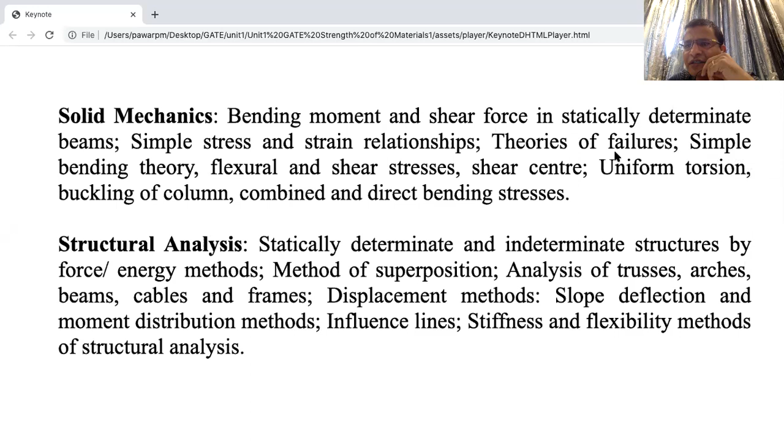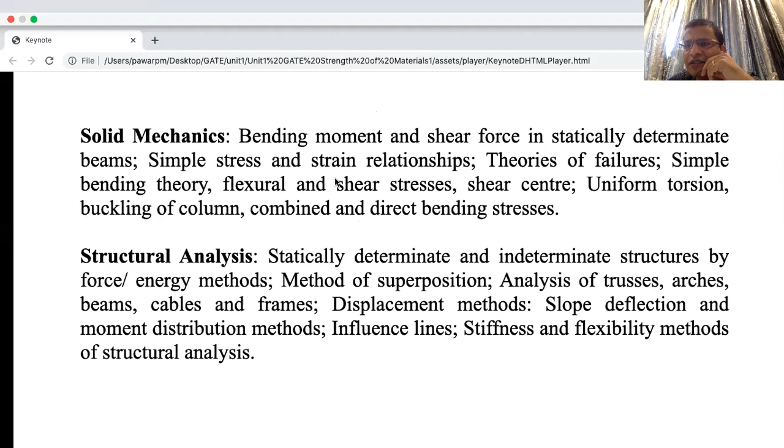Theories of failure, simple bending theory, flexural and shear stress, shear center, uniform torsion, buckling of column, combined direct bending stresses.

What is strength? As you know, strength is the ability of a part or element of a structure to resist failure.

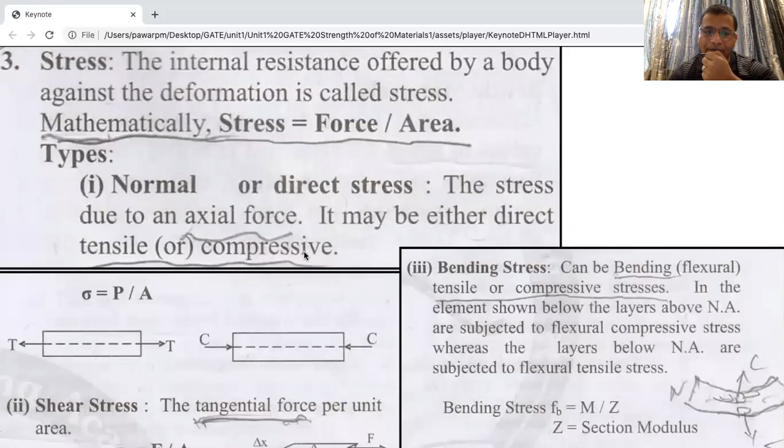Next we will study the point called stress. All of you know stress is nothing but force divided by area, but most of the times when we say stress, what comes to your mind is force divided by cross-sectional area. But please remember, this stress is called axial stress. As we discussed earlier, there are two main types of stresses. One is called normal or direct stress, and another is called shear stress. The normal stress is of two types, tensile or compressive, and shear stress is given here.

You can see shear stress also has the formula force divided by area, but please understand that the area in normal stress is called cross-sectional area. So what is cross-sectional area? Cross-sectional area is the area perpendicular to the applied force. Earlier you might have studied the definition of stress, but now I am giving it a different angle. The cross-sectional area is nothing but the area perpendicular to the stress.

And what is this area in the shear stress? This area is nothing but the area along the applied force or along the body. For example, if we take a pile foundation, the bottommost part of the pile is a cross-sectional area, and the skin part of the pile is the area which will help to resist through shear stress, and the bottommost part will help to resist through the direct stress. So please understand that.

Apart from normal and shear stress, there are two other stresses we have to understand. One is bending stress, then there is shear stress due to torsion, and in bending there will again be two stresses: one is bending stress, and another is stress due to shear force. In bending stress, you will see sigma is equal to M by Z, and here the formula is F by A. That difference you have to understand. Again, M is a component of force, whereas Z is a component of geometry. You have to remember that.

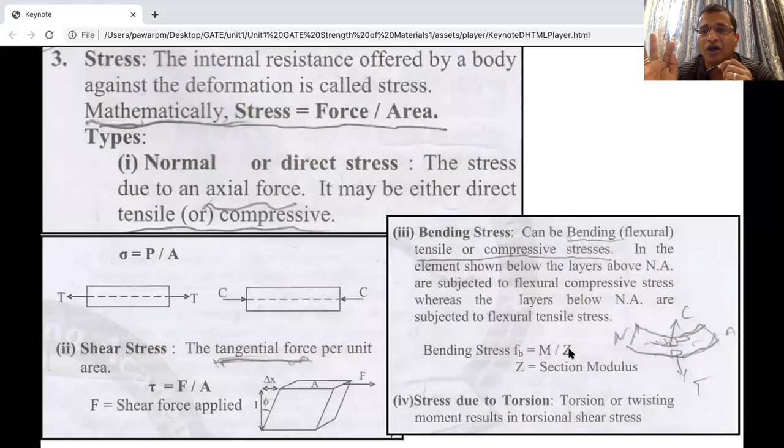You can say axial will create normal stress, shear stress will create shear, bending stress will create normal, and torsion stress will create again shear stress. So you have to remember the difference.

Let's go to strain. What is the definition of normal strain? The way we have two types of stress, normal stress and shear stress, similarly for strain also there are two types. One is normal or direct strain, and another is shear strain. The direct strain is nothing but change in length caused by normal force in its direction, whereas shear strain, in case of tangential force, is a change in angle. So shear strain is calculated based on the change in angle.

You can see here this bottom part is fixed and load is applied here, and that's why the body will get deformed in this direction, and this angle will help us to calculate the shear strain. Next, one more strain is there, that is called volumetric strain. What is volumetric strain? It is nothing but the ratio of change in volume to the original volume.

Further, we have studied Hooke's law. What is Hooke's law? Stress is directly proportional to strain within elastic limit. The next part, within elastic limit, is very important. Stress is directly proportional to strain within elastic limit, and strictly speaking up to limit of proportionality. So you have to understand two different things: one is limit of proportionality, another is elastic limit. Instead of within elastic limit, actually it is up to limit of proportionality.

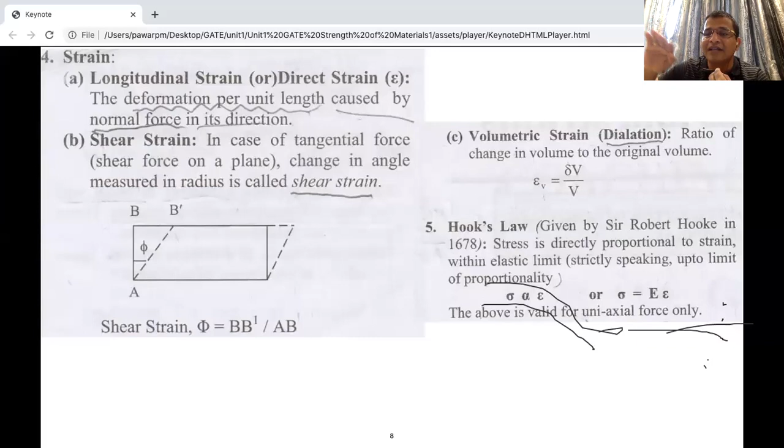Let's go to the next important point. A lot of questions come in various competitive exams, not only GATE, but MPSC, UPSC. Though for university examination it is just 2 to 10 marks or 5 marks sometimes, this chapter is very important from the competitive exam point of view. That's why you should read a little bit of material-related books also, because we are structural engineers; mostly metallurgy and mechanical people are quite conversant with material components like carbon and steel, but we are not, and it's good to study that part.

Basically, when we take a material from the structural point of view, there are two types of materials. One is ductile material and another is brittle material. So what is meant by ductile material or ductility? When you go in final year, there is a separate chapter in earthquake engineering about ductility. If you can see in this diagram, ductility will be important beyond the yield limit.

Within elastic limit, ductile material and brittle material behave the same. Please understand that part. So where is the difference? Most people don't understand that. The difference in ductile and brittle material starts beyond yield limit. So what happens? From the starting point up to failure, how long it prolongs, that means the ductility. As it takes a lot of time for the failure, that kind of material is ductile, and such material is good for earthquakes, so that it absorbs as much energy.

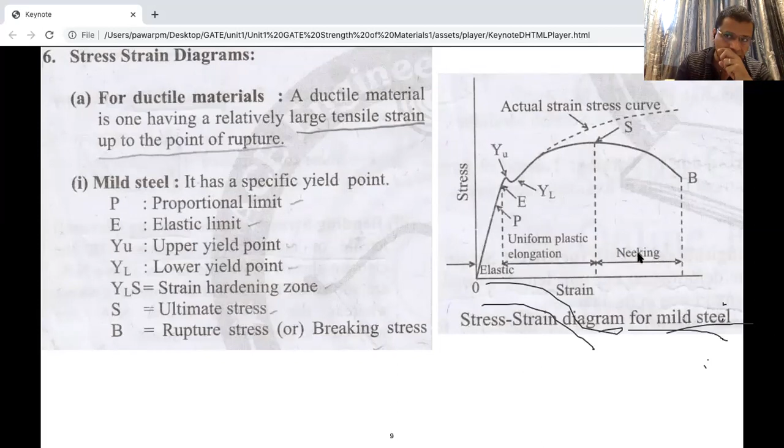This part is called the elastic phase, then this part is called uniform plastic elongation, and thereafter neck formation takes place. So if you have done the UTM test of a rod, you can understand this neck formation phenomena, and then the last B point is called rupture stress or breaking stress, where the material actually fails.

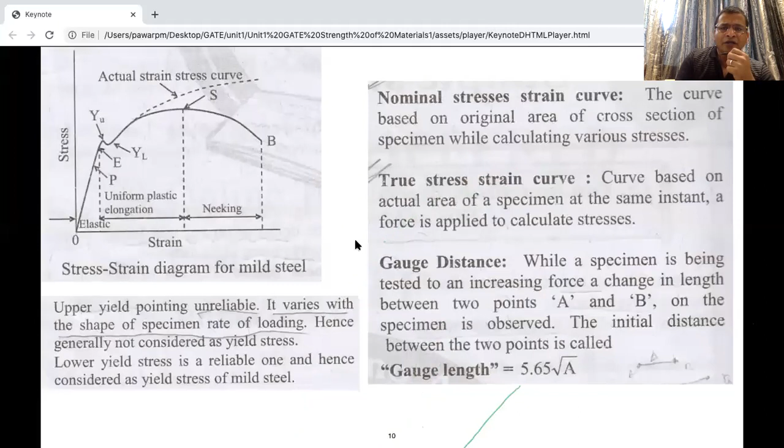Okay, so this is what is explained here. So I will skip this part, already we have discussed this. Then in this, we have seen earlier this was related to mild steel.

Now a little bit of description is there for Tor steel. Like for Tor steel and aluminum, they do not have any specific yield point. So please understand, for some material it is very difficult, there is no specific yield point, and in that case what we need to get is called proof stress.

So it is called proof stress. And how do you decide? It is nothing but when it crosses the 0.2% of strain point we take. So here I will read this part, you will understand. A line is drawn, this is very important.

Sometimes a proof stress question will be asked. A line is drawn on the stress strain diagram parallel to the initial linear part of the curve, but is offset by some standard amount of strain. This 0.2% of residual strain is taken, and such a line is drawn to cut it here, and this is what you get, called proof stress, where we are not getting the yield stress.

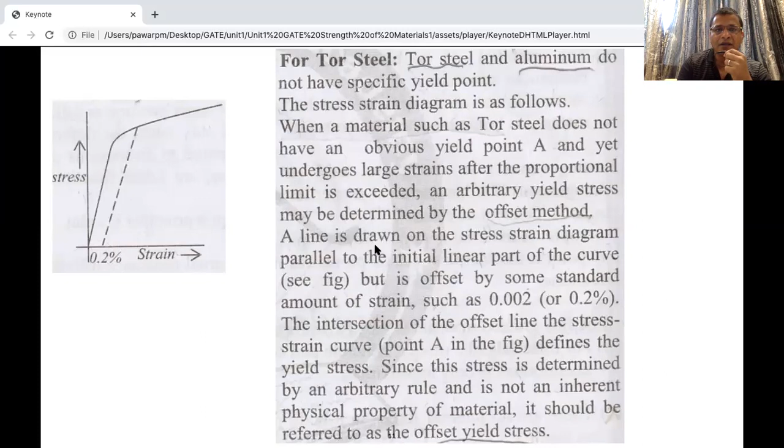Then we will understand brittle material. So what is brittle material? Material that fails in tension at relatively low values of strain is classified as brittle material. So you can see a brittle material will not have a lot of phases like what you have seen in mild steel. Here it fails suddenly, and you can see within the elastic limit it behaves in a similar manner as your ductile material.

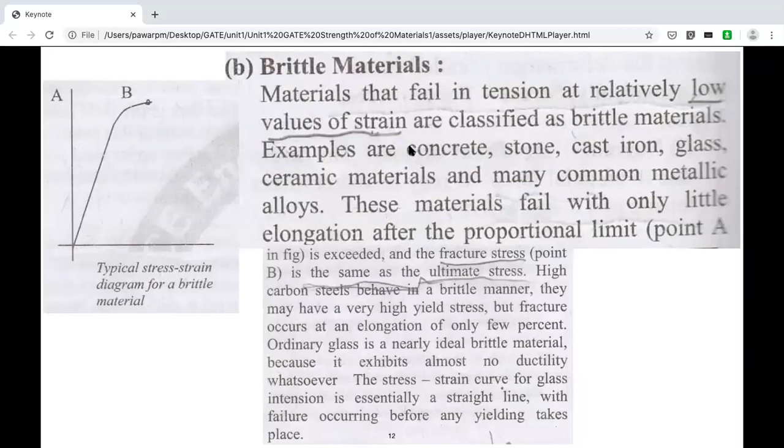So we'll go to the next point. So here there are a lot of definitions. When I share the material, you can read. We have discussed about elastic material, plastic material. So this is new for you.

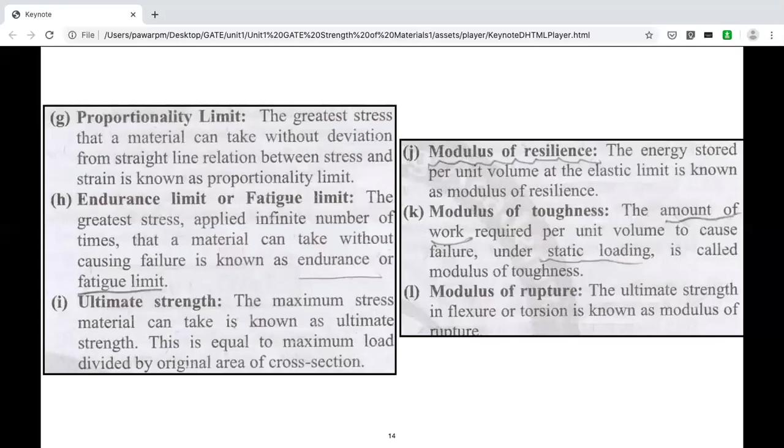Then proportionality, we have seen. Endurance limit is maybe a new term for you, or fatigue limit. So the greatest stress applied infinite number of times that a material can take without causing failure is known as the endurance limit. So this one is like continuously applying the load, as in UTM, where we go to the yield limit. But we have to understand another way of failure, that is called fatigue limit, fatigue.

So in that we don't apply a high amount of force till the stress goes to the yield stress. We apply less amount of stress, but we apply it in a cyclic manner.

In your childhood, you might have tried to break aluminum wire or steel wire by doing a repeated amount of cycles. There we are not pulling to make the material fail, but applying a lesser amount of stress in a cyclic manner, and that phenomena or kind of failure is called fatigue limit, shown using a stress versus N curve.

S stands for the amount of stress applied, and N stands for number of cycles. As the stress is less, the number of cycles required will be more, so the curve is decreasing. When applied stress in fatigue is less, the number of cycles will be high, but when applied stress is high, the number of cycles is less. You have to understand this.

In a working manner, for example, you might have seen a cycle chain or vehicle chain breaking. We daily apply rotations on that chain, and fatigue kind of stresses come and accumulate, and slowly one day it fails. That is called the endurance limit.

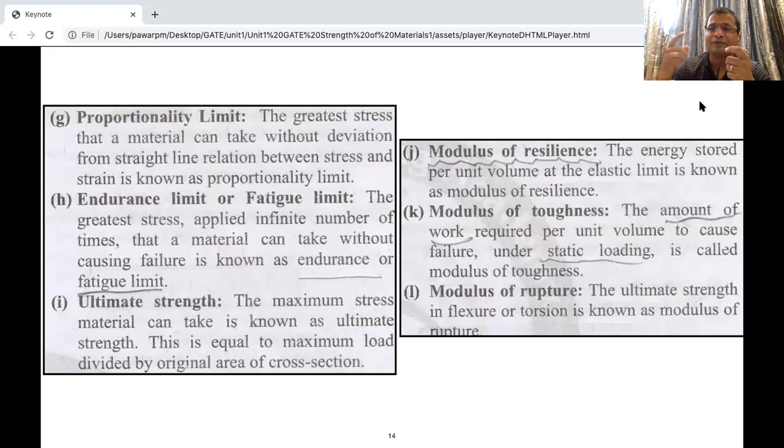That's why when deciding warranty, for example for a phone or material, regarding this kind of fatigue, people estimate the regular load that comes in usage, and based on that number of cycles they apply, they decide the limits.

This is one more definition you should remember, called strain hardening. You have seen one graph going down with the dotted line going up. In some material, instead of the graph going down, it starts going in the upward direction. That phenomena is called strain hardening.

The increase in strength of material after the plastic zone due to rearrangement of molecules of the material is called strain hardening. This is sometimes a useful phenomena, so you have to understand that.

Next, you have already studied this, we are brushing it up, and then immediately we'll start question answer solving. What is factor of safety? It is defined as the yield stress divided by working stress for the ductile material.

There are two different definitions you have to understand: one for ductile material, another for brittle material. For ductile material, it is yield stress divided by working stress, where you will be able to find out exactly yield stress. Whereas in case of brittle material, it is ultimate stress divided by working stress.

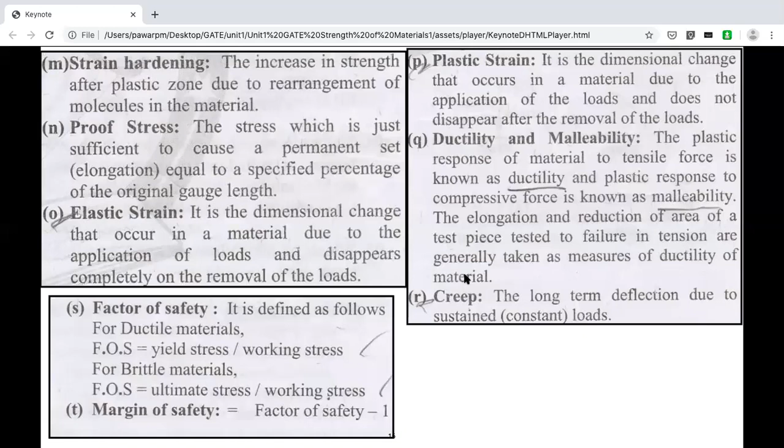The elongation and reduction in the area of the test piece tested to failure tension are generally taken as a measure of ductility of material.

Creep is another very important phenomena, especially in soil mechanics, where creep becomes important. The long-term deflection due to sustained load means, for example, if we construct a building, whether load changes in a building, assuming that furniture and other material are considered.

So the dead load, ignoring wind load and earthquake load, remains constant. But because of creep phenomena, there will be settlement in the foundation, so we have to take care of the foundation properly. If settlements occur, initially you get hair cracks, and then big cracks may also occur. That phenomena is called creep.

That is, your force is constant, still deformation over a period starts taking place. When we draw the stress strain curve, we don't take time into account, it's an instant phenomena, whereas in creep it is time dependent. So what happens is, over a period, deflection starts.

In that case, force is constant, means in the stress strain curve, what is constant? Force divided by cross sectional area, that is stress, remains constant, whereas the strain keeps on increasing. So under constant stress, strain will keep on changing.

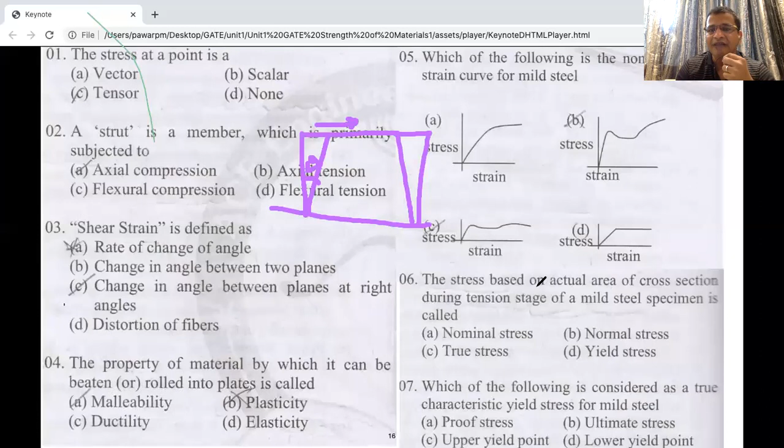Next question: the property of material by which it can be beaten or rolled into plates. Please don't get confused here, sometimes people confuse this with ductility, but the answer is malleability.

Which of the following is the nominal stress strain curve for mild steel? If you remember, there's a chance you get confused. This B curve and C curve almost look the same, but strain hardening takes place in one, whereas in mild steel strain hardening won't take place. That's why the answer is C.

So then we'll go to the sixth question. The stress based on the actual area of the cross section during the tension stage of the mild steel specimen is called - please understand, one is called nominal stress. What is nominal stress? P divided by A, the cross sectional area. But there is something called true stress. What is true stress? Actually, when we elongate, there is neck formation, and the area starts reducing under tension.

Under compression, cross-sectional area starts increasing, and that's why the answer will be true stress. Answer will be nothing but true stress.

Yes, some of them are ticking on my answer, so you can use annotation. If you want, you can answer before I give the answer. That will be good, so that interaction will happen. Good. Some of you are using annotation. There is an annotate option, and you can click. Next question. But before I read a question, please don't answer, otherwise others will lose interest.

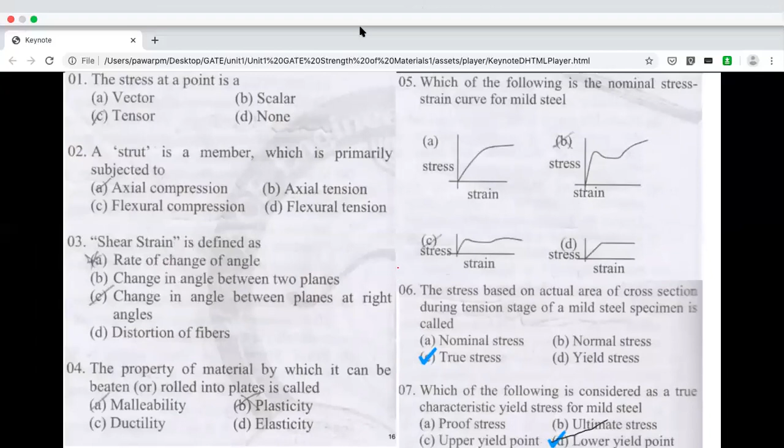Which of the following is considered as a true characteristic of yield stress for a mild steel? There is proof stress, ultimate stress, upper yield point, and lower yield point. From this group you can understand. I guess the answer is lower yield point. Yes, some of you have answered correctly. Very good. So lower yield point is the correct answer.

I request those who are joining again to mute their audio. Oppo A33F, instruction for you. Okay, let's go to the next question.

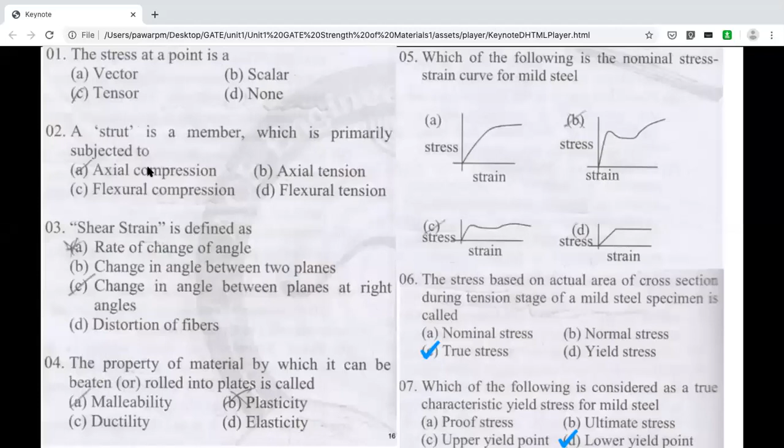For mild steel, the lower yield point is more significant than the upper yield. Just now we saw the answer: mild steel characteristic is lower yield point. So why is this lower yield point important? Strain is more at this point, it is less than upper yield point, it is less affected by the shape of the section. Maybe the answer is C. Yes, the answer is, it is less affected by the shape of the section. Let's go to the next point.

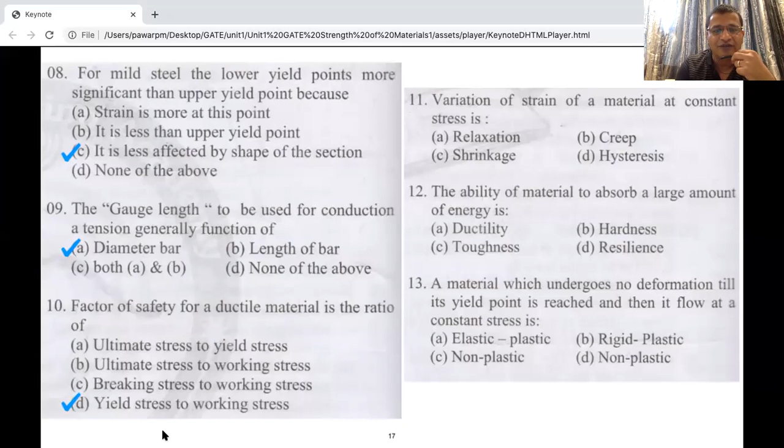What is the gauge length to be used for the conduction, a tension generally function of? Here it is the diameter of the bar. Where the tension is a function of the bar diameter, gauge length becomes important. Next is factor of safety. What is factor of safety for ductile material? As we have seen, yield stress to working stress. We have discussed a lot, so I will go quickly.

Variation of strain of a material at a constant stress. Tell me the answer if you have understood the theory. I will wait for 2 minutes. It's very simple. I said force was constant, but strain was increasing. Very good. The answer is creep. Correct.

Next, the ability of material to absorb large amount of energy. I have explained this using the stress strain curve. So the answer is toughness. This is a different answer as compared to ductility. We'll see why the answer is this.

Then the material which undergoes no deformation till its yield point. This we have not studied, so I will focus on this part by drawing. A material which undergoes no deformation till its yield point is reached and then follows the constant stress path. Up to yield point it won't deform and suddenly it starts following something like this. Is it elastic plastic, rigid plastic, or non-plastic? The answer is B, rigid plastic. The initial part was rigid.

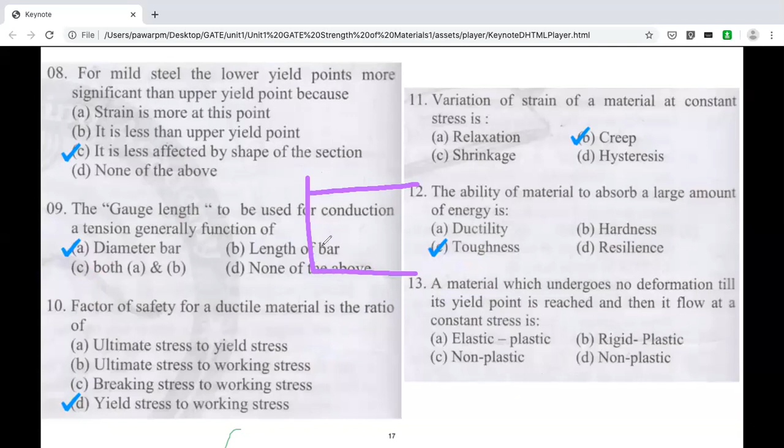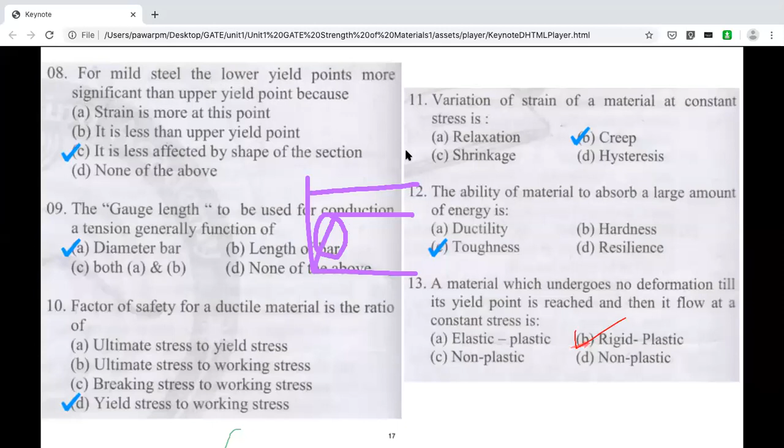If it had been something like this, it is called elastic plastic. The initial part behaves elastic and then it will be plastic. Some of you have given the answer correctly. The correct answer is rigid plastic. Let's go to the next question.

Please, all of you, mute your voice. Okay. So next we will go to the next question.

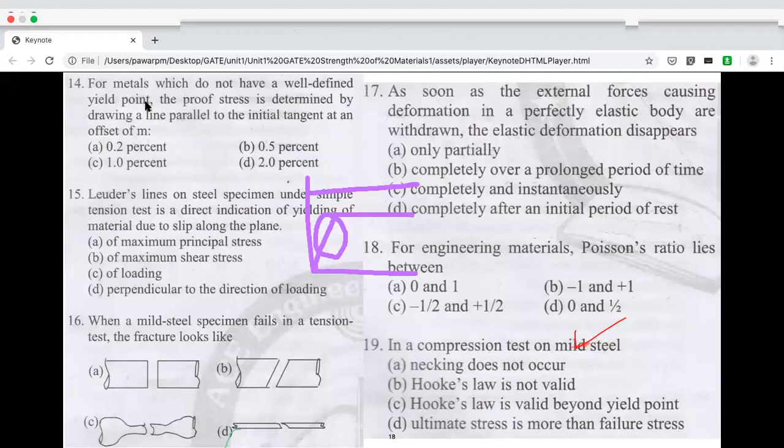For a metal which does not have a well-defined yield point. This is a very simple answer. When the yield point is not well defined, we use proof stress, and it is determined by drawing a line parallel to the initial tangent at an offset of how much: 0.2%, 0.5%, 1.0%, 2%? Quickly, very easy. Yes, some of you have given the correct answer. That is 0.2%. Next, let's go to question number 15.

Lüders lines on steel specimen under simple tension test are a direct indication of yielding of material due to slip along the plane. This is a little difficult question. I guess it may be the maximum shear stress. These lines form because of maximum shear stress. If you study failure of material in detail, you will come to know. If not, for the time being remember this if it comes in the exam.

Next question is very easy, by looking at the diagram: neck formation phenomena. When a mild steel specimen fails in a tension test, how does the fracture look for mild steel? This is like a ductile failure.

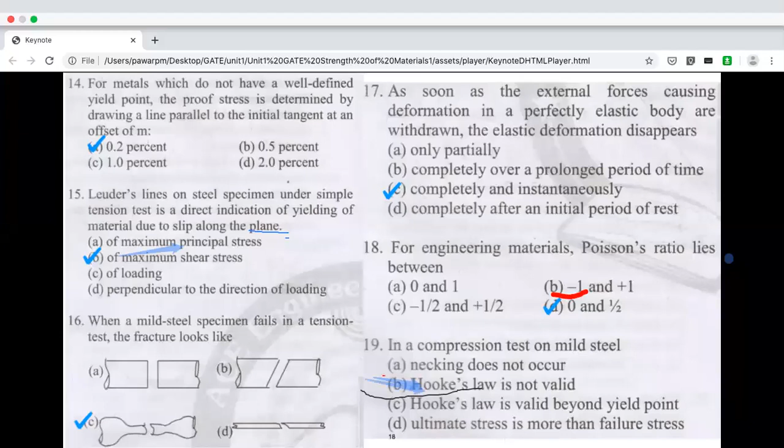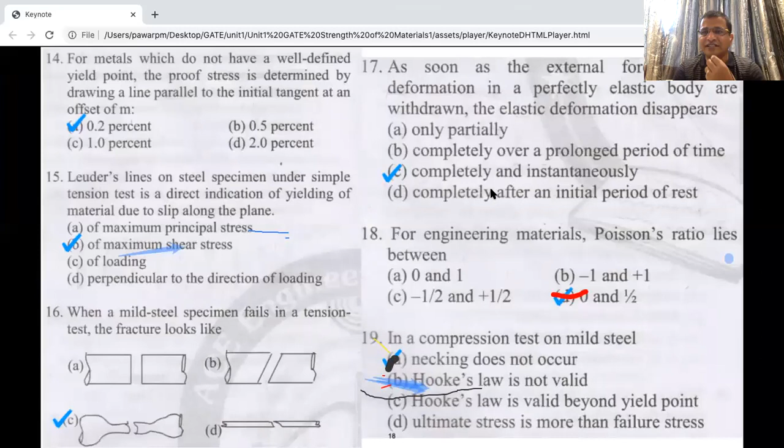In a compression test on mild steel, let's see the answer. The answer is necking does not form. If you have noticed, in the case of tensile stress necking forms, but in the case of compression necking will not form. Okay, let's go to the next part, 20th question. Once we finish the theory part, I will ask you to talk, maybe before I go to the next part.

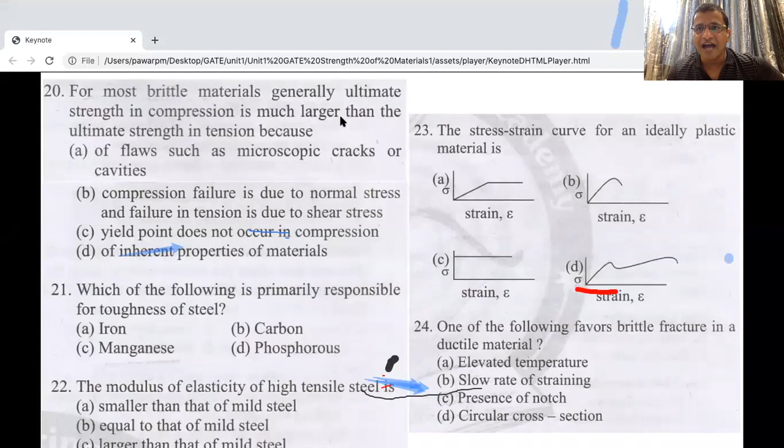20th question. For most brittle materials, the ultimate strength in compression is generally much larger than the ultimate strength in tension because, can you guess? This is related to metallurgy, but it will be asked in civil engineering also. As compared to tensile, compressive strength is more. So what is the reason? The answer is flaws such as microscopic cracks or cavities get compressed, and that's why strength increases as compared to tensile.

Let's go to 21. Which of the following is primarily responsible for the toughness of steel? Let's see your physics knowledge. Okay, good. The blue pen: B, carbon. I guess all of you must know at least this much metallurgy. No, the answer is manganese. Carbon is for hardness, I guess. So this is manganese.

You can check that. The modulus of elasticity of high tensile steel is smaller than mild steel, equal to mild steel, larger than that of mild steel, or equal to that of aluminum. The answer is equal to that of mild steel, because sometimes the elastic properties will not change; beyond elasticity, properties will change.

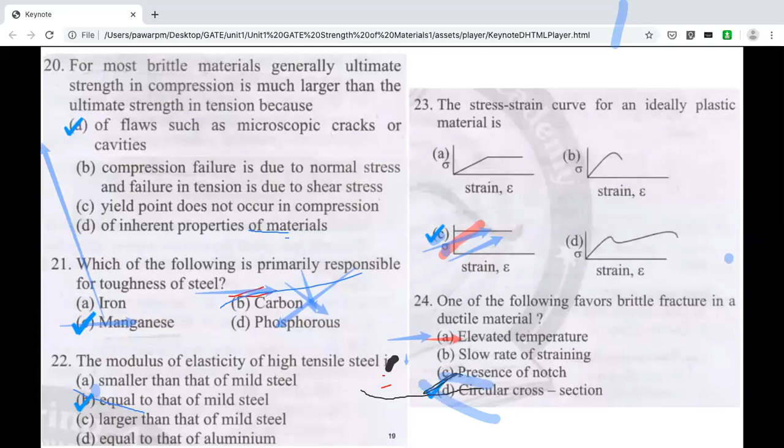Okay, let's go to the stress-strain curve for ideally plastic. It's very simple. Ideally plastic, yes, the answer is C. Let's go to 24. Which of the following favors a brittle fracture in a ductile material? Elevated temperature, slow rate of strain, presence of notch. So the answer is circular cross section. Check this. You might have understood these question answers are a little different here compared to what we were checking in the university.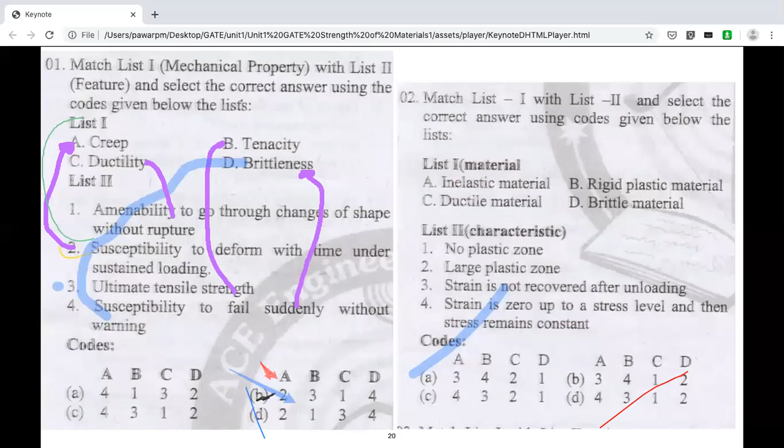Yes, correct. And then the first part, it changes shape without rupture, is nothing but ductility. So by these arrows we have to find the answer. For A 2, for B it's 3, for C it's 1, and this. Let's see whether the answer is B or not. Let me check. Yes, answer is B, correct. Let's go to the next question.

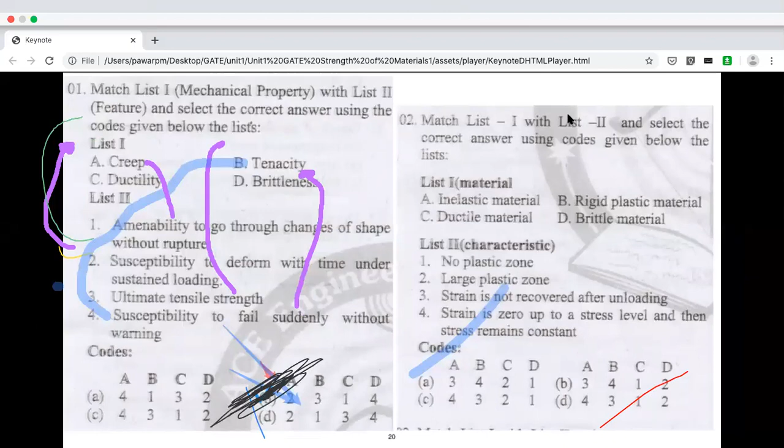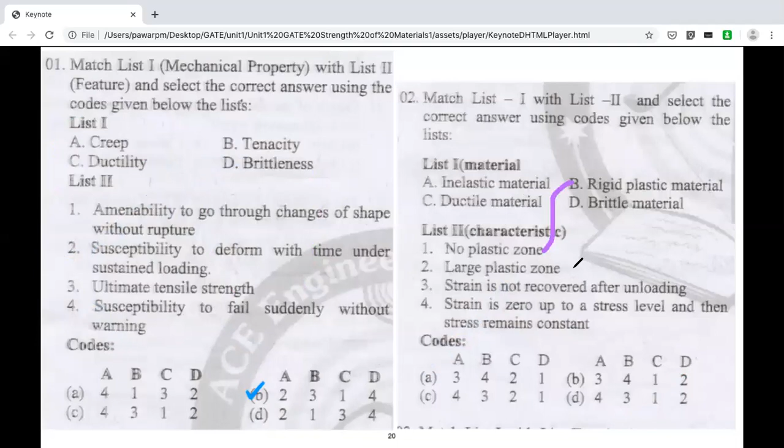Okay, here match the pair. Inelastic material. So we will read this part. No plastic zone. What is meant by no plastic zone? Obviously rigid plastic material. Then large plastic zone. I guess it is maybe ductile material or inelastic material. Strain is not recovered after unloading. Yes, that is called maybe inelastic material. Strain is 0 up to the stress level.

Oh, I made a mistake here. So the fourth one will be linked with B, that is rigid plastic. So this is wrong from my side. Strain is not recovered after, that is correct. Large plastic zone; no plastic zone maybe linked with brittle. Let's see if we have done correctly. So the answer will be, let me check. Yes, answer is A.

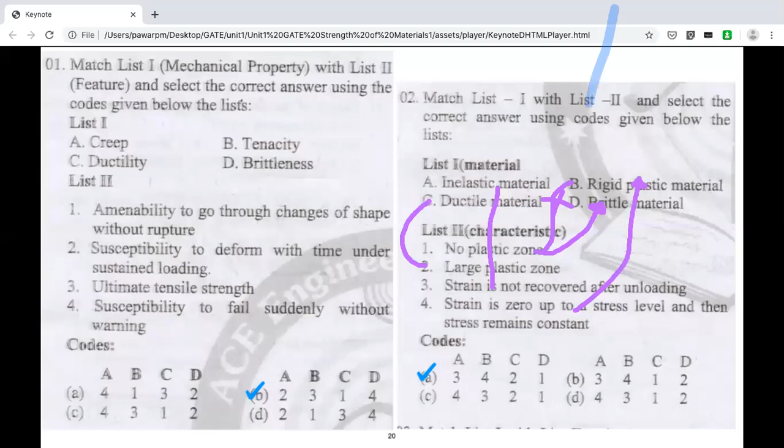So for A, 3, correct. For B, 4, that is rigid plastic, correct. For C, 2, large plastic zone for ductile, and for D, 1, that is brittle material, no plastic zone. That is, suddenly it fails. Plastic zone will not be there. Okay, good. Let's go to the next question.

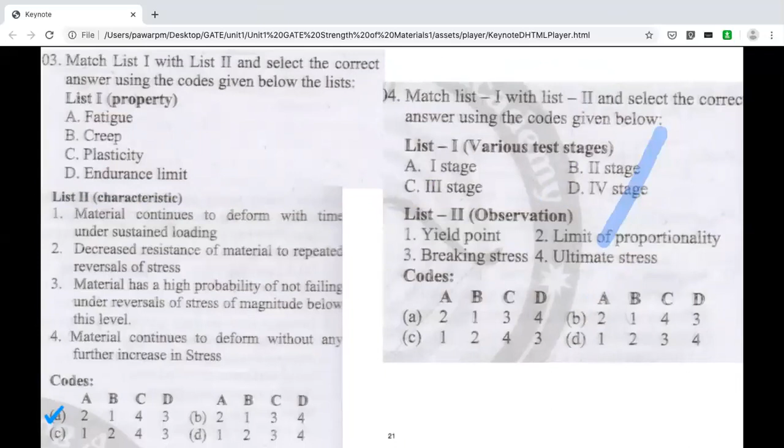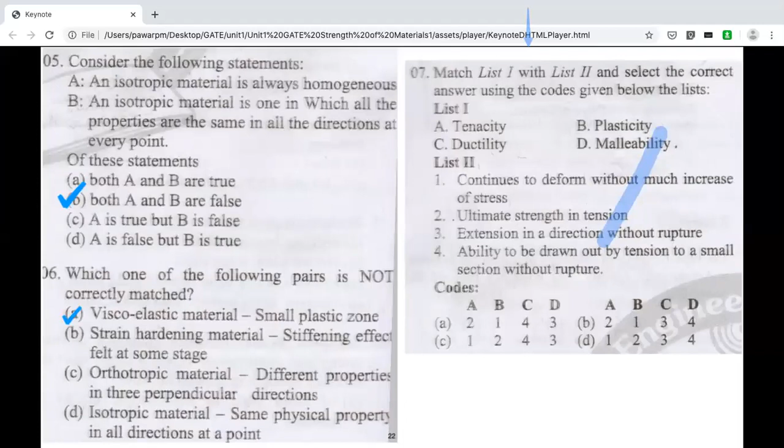So these are similar questions. I will skip some of this in the interest of time, so that you can read when I provide this material. You can read once again some of the points. So this is how such questions are asked in GATE and competitive exams. So I will skip this part. Maybe you can see the answer; similar match the pair questions are there. So I'll skip that part. And then we will start one more theory part.

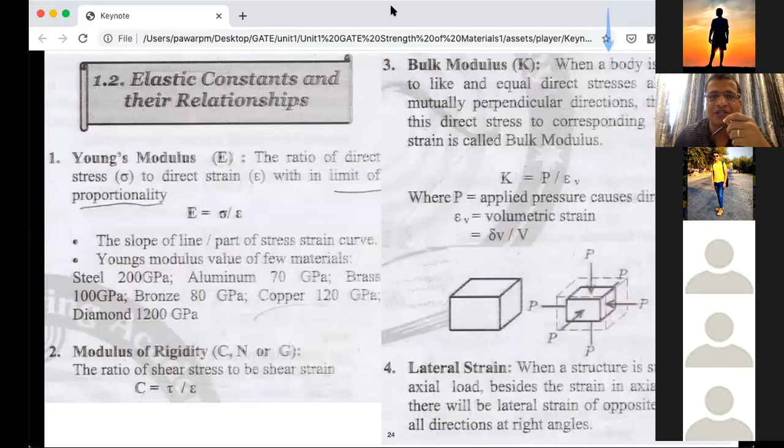So let us continue with the next topic so that we can cover at least this part today. So, elastic constants and their relationship. This is another important point we will cover here. Let's see what is there. Elastic constant: as you know, Young's modulus is nothing but the ratio of direct stress to direct strain within the limit of proportionality. Please understand, it is not within elastic limit.

And the next point is very important, that is the values of Young's modulus. You'll have to remember them so that you get the idea about the behavior of structure, for whatever materials we generally use, metals, etc. The highest Young's modulus is of steel, 200 GPa, aluminium around 70 GPa. Why am I saying around? Because as the composition of material changes, exact material property values will be different. That's why I am telling this. Then copper 120, diamond around 1200 GPa. It's quite high.

Modulus of rigidity. Please understand the notation for modulus of rigidity is sometimes C, N or G. It is nothing but the ratio of shear stress to shear strain. Then bulk modulus is another. So there are three moduli of elastic constants: Young's modulus, modulus of rigidity, and bulk modulus.

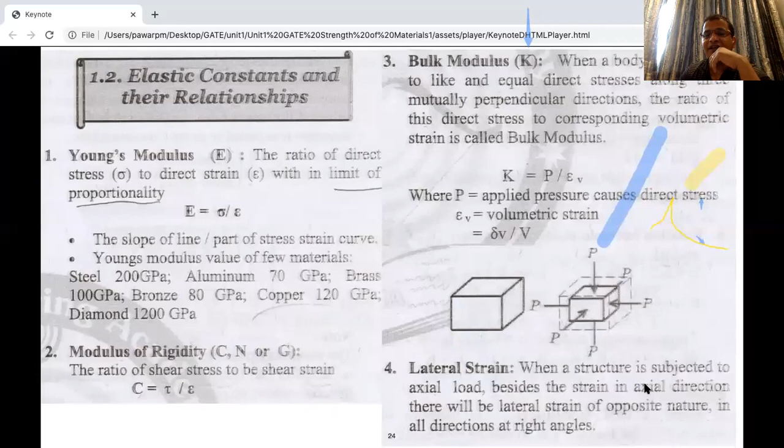Opposite nature means if I apply tension in the one direction of interest, the other two directions will have compression. If I apply compression in one direction, the other two directions will have tension, of course at right angles. From that we get what is called Poisson's phenomenon. Poisson is a scientist's name. From that we get the definition of Poisson's ratio: the ratio of strain in the lateral direction to that of the axial direction.

So you can see mu is equal to minus lateral strain by linear strain. Why is minus given? Because when we apply compression, the other side will be tension. So signs are positive by negative or negative by positive, so the ratio will always be negative, and multiplying by minus you get a positive answer. The maximum possible value of Poisson's ratio is 0.5, for an ideal elastic incompressible material whose volume strain is 0. You should remember some Poisson's ratio values, because they may be asked in the exam as MCQs.

For cork, Poisson's ratio is 0. Poisson's ratio 0 means if I apply axial force, nothing will happen in the other two directions. Concrete 0.1 to 0.2, glass 0.2 to 0.27, cast iron 0.2 to 0.3, steel 0.27 to 0.3, aluminium 0.33, brass 0.34, gold 0.44, and rubber 0.5. So usually for metals we take around 0.3, and for concrete somewhere around 0.15 to 0.2 as Poisson's ratio.

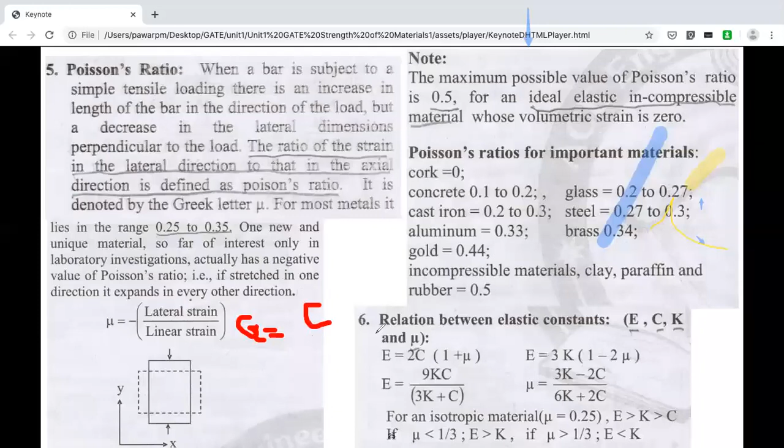Oh, so E divided by 2 into, okay, it's not working. So please remember, G is equal to E divided by 2 into 1 plus mu, is very easy to remember, and K is equal to E divided by 3 into 1 minus 2 mu is the relation. And this relation also you should remember, because for competitive exam you cannot waste your time in deriving.

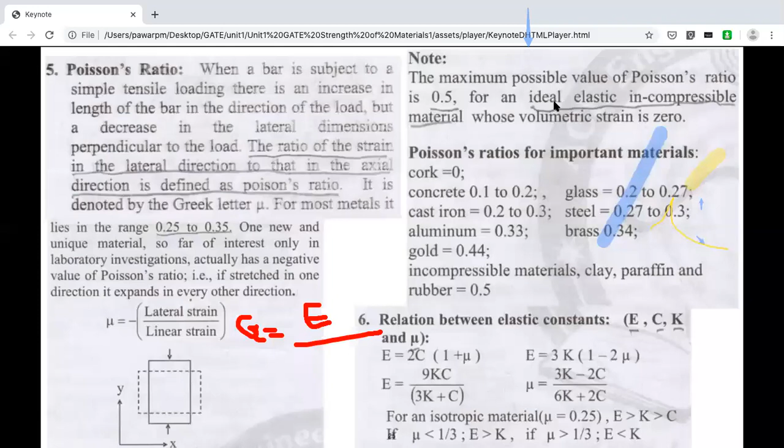So all such formulas for my GATE, I remember I had mugged, or maybe somehow I had remembered 400 to 500 formulas and around 400 to 1000 different values and keywords. So you should have all these things in the back of your mind while remembering. If you link it with its physical things, then it will be easy.

And you also should know that for isotropic material, E will have the highest value, typically for 0.25 for isotropic material. E will have the highest value. Thereafter K, I have derived in next slides how it comes, and then G or C will have the lowest value.

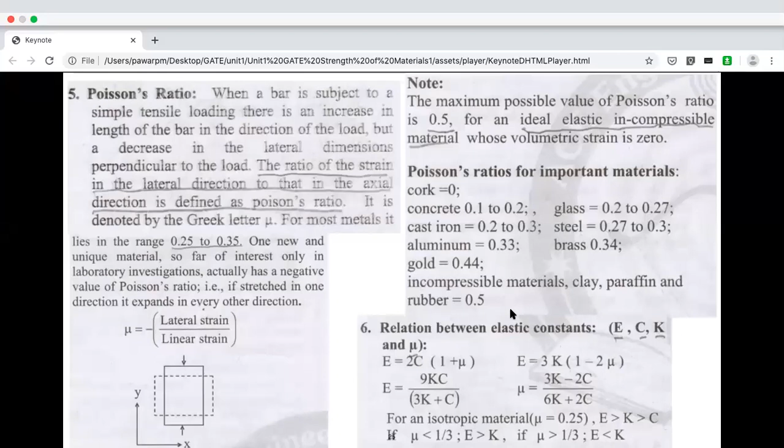Okay, then for the isotropic material, elastic constants. So this is another question usually asked. This is the advanced part which you have not studied. I have copied this for your reference, how these constants are there, but sometimes these questions are asked. As I told you, there are 3 types of material based on the isotropy nature. One is isotropic material. The number of independent elastic constants are 2, that is E and mu. For orthotropic material, these are 9, and for anisotropic there will be 21.

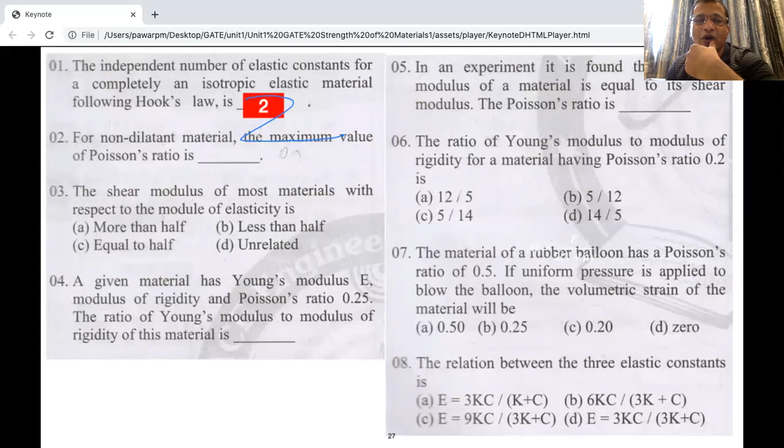So now we have covered the theory part. For this, let us take question answers related to that and understand. So the independent number of elastic constants for a completely isotropic elastic material following Hooke's law is, just now we have seen, the answer was 2. Then for non-dilatant material, the maximum value of Poisson's ratio is, so you remember it will be the highest value, it is 0.5.

Okay, then the shear modulus of most of the material with respect to modulus of elasticity. Shear modulus of most of the material, you can derive it, how the answer comes. If you don't get clear why this answer comes, the answer is less than half. So if you derive it by taking maybe mu is equal to 0.3, somewhere I have derived, I will show you that.

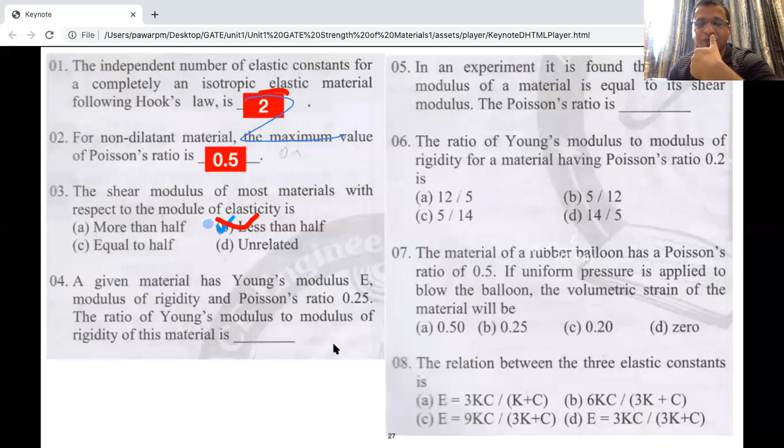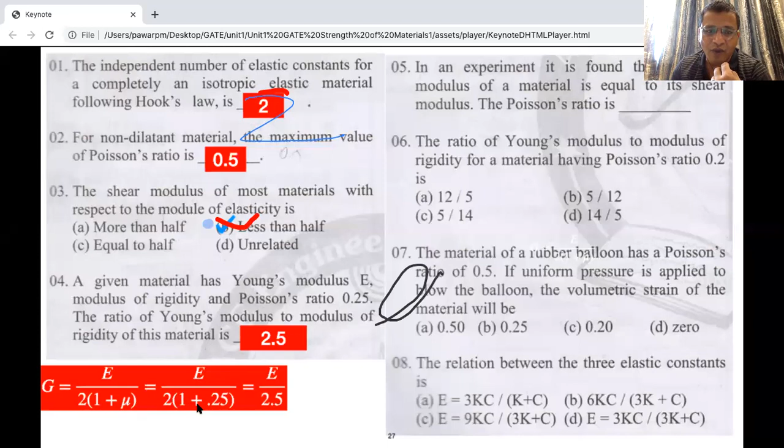Then a given material has a Young's modulus E, modulus of rigidity G and Poisson's ratio as 0.25, then the ratio of Young's modulus to modulus of rigidity of this material. So here it is asked the ratio of Young's modulus to modulus of rigidity, that is E by G ratio. So it is 2.5. How the answer comes, I have derived here. So as I told you, what is the G formula? Actually G is equal to E divided by 2 into 1 plus mu. Okay, and then E is equal to 2 into, we have to put this as 1 plus 0.25, and then you get E by G as 2.5.

Okay, let's go to the next question here. In an experiment, it is found that the bulk modulus of material is equal to its shear modulus. What is the meaning of that? G is equal to K. If G is equal to K, then what is Poisson's ratio? Very interesting question. Such questions we have not studied in our university setup. So this kind of question answer is very important. So I'm deriving here. So what is given? G is equal to K is given. And from that, we have to find out Poisson's ratio.

So this is the formula for K, E divided by 3 into 1 minus 2 mu. This is the formula for G, E divided by 2 into 1 plus mu. And then you have to equate K is equal to G. I have equated, E gets cancelled, and if I rearrange, you will get the answer as mu is equal to 1/8, which is nothing but 0.125.

Similarly, the ratio of Young's modulus to modulus of rigidity. What is meant by that? That is E by G for Poisson's ratio 0.2. So similar to this, here in the question 0.25 was there, here 0.2 is there, and check that you get this answer, that is 12/5. And then next, for rubber the Poisson's ratio is 0.5. Already we have seen this. This is very easy. So I will wait for your answer. 8th question, relation between three elastic constants.

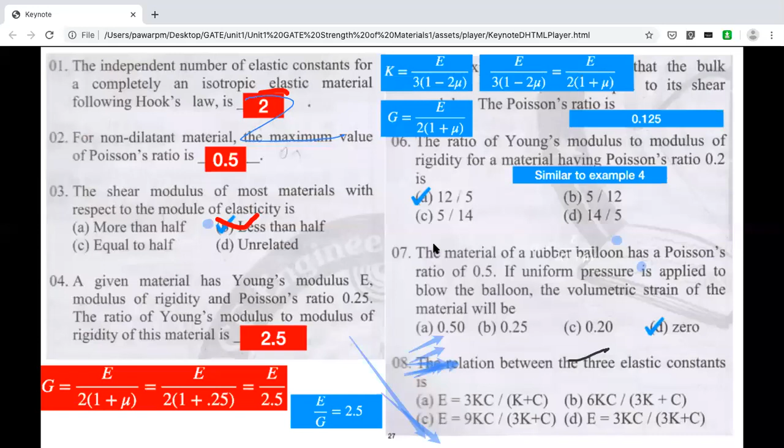If you see this derivation, let me highlight it. With Poisson's effect, the strain comes as sigma x by E, minus mu into this, and if you substitute here, epsilon x comes out to 0.

Similarly, epsilon y also comes 0, epsilon z also comes 0, and epsilon v, that is volumetric strain, is equal to epsilon x plus epsilon y plus epsilon z, which is equal to 0.

Sometimes this part, that is sigma z, is ignored. In that case also, if you keep this as 0.5 and add the three strains, the answer will still come as 0.

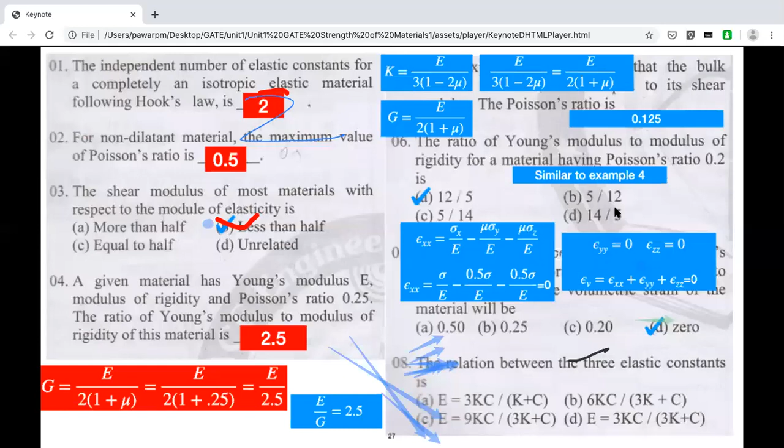Okay, next question. For any structural material, the value of Poisson's ratio is always - we have studied this, very easy answer. I will wait.

0 to, oh someone wrote 0 to 0.05. It should be 0 to 0.5. The correct answer is, I guess, 0 to 0.5.

Correct. So next, for structural steel, the relative magnitude of the three moduli - E, C, K. Which one will be highest? Of course you have to understand E is the highest.

Whether the answer is A, let us check. So the answer is C. E is the highest, then K, and then comes C.

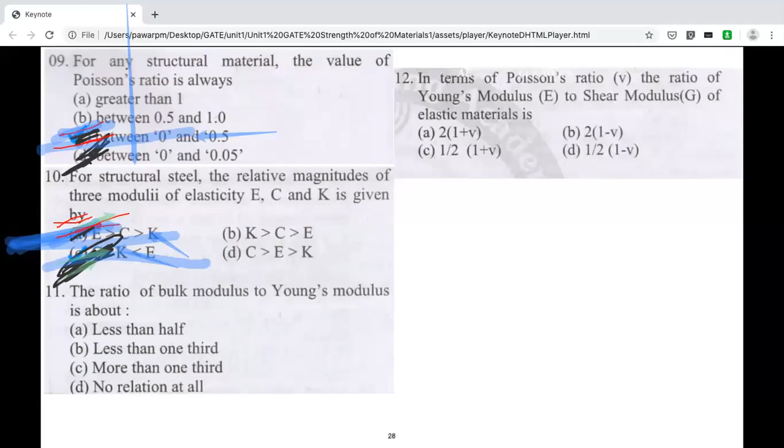So you have to remember: Young's modulus will have the highest value, then the next highest is bulk modulus, and the lowest one is modulus of rigidity. You may ask, can you prove it, sir?

So this is how you can also do the scribbling on your notebook and get the answers. But for such repeated type of questions, you should remember them so as to save time in the exam.

Okay, the ratio of bulk modulus to Young's modulus is about more than 1/3. So, bulk modulus to Young's modulus.

So you can see here, K by E is 0.83. So I guess the answer is correct, C.

And then here, this is a simple formula, so we can skip that part. So whatever we have seen now, we have another 20 minutes, so let us take the numerical type of questions that are asked in the exams.

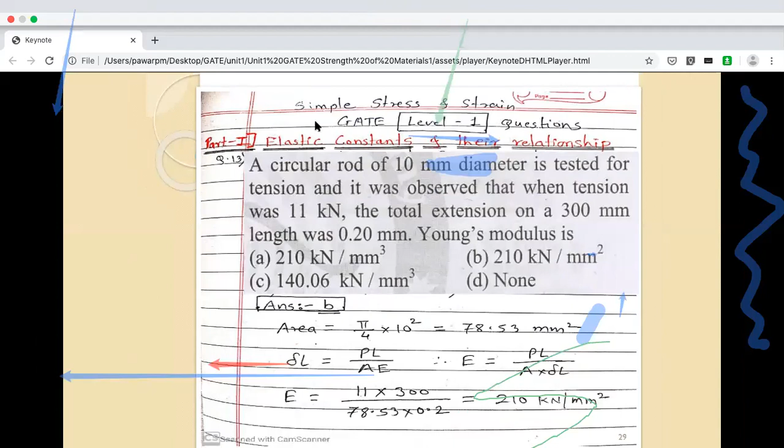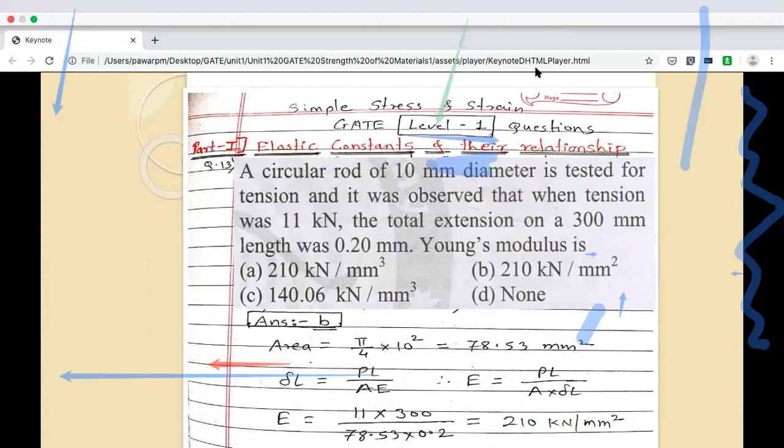Okay, now I will request you not to do scribbling so that I can discuss here. For a circular rod of 10 mm diameter, you can take pen and paper and start doing calculations instead of writing this question and answers.

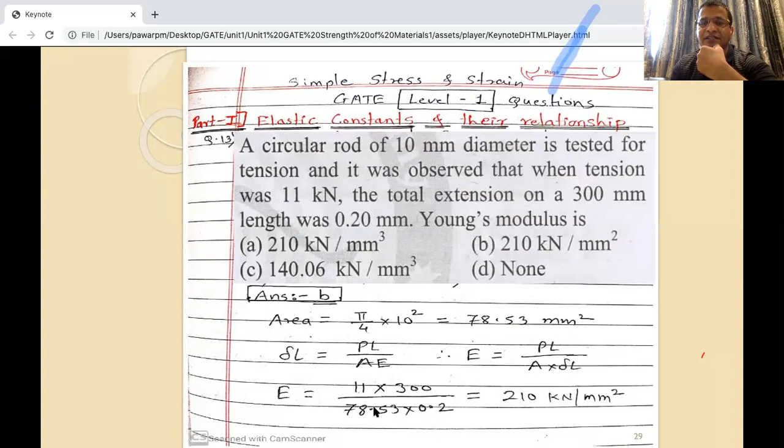It is very easy. You know the change in length is PL by A, and from that you have to convert E equal to PL by A into del L. If you substitute P as 11 kilonewton, L as 300, A as 78.53 for 10 mm diameter, and change in length as 0.2, and do all this calculation, it comes as 210 kilonewton per square millimeter.

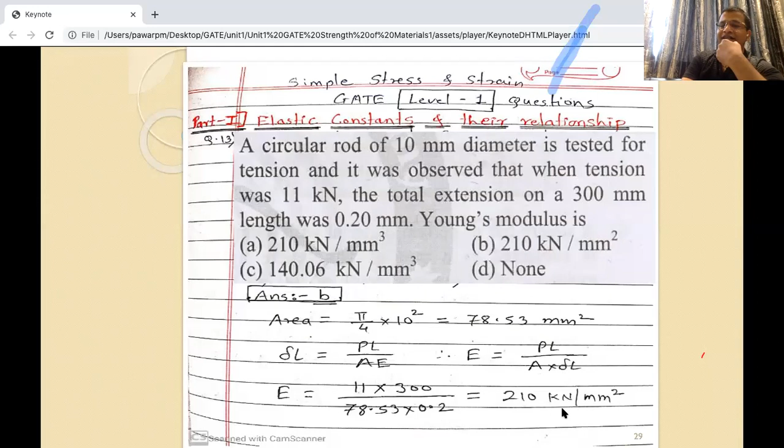So this is the answer. So you can see that.

Okay, next question. If modulus of rigidity is 80 kilonewton per square and bulk modulus is 140 kilonewton per square, what is the Poisson's ratio?

So if you can directly remember this relation, it is very good. If you don't remember, you can write it separately, it will take little time. But if you know this relation directly, substituting the values, the answer comes as 0.26.

You can try it by doing this. And if you don't know this direct notation, you know the relation of K, you know the relation of G, and take the ratio.

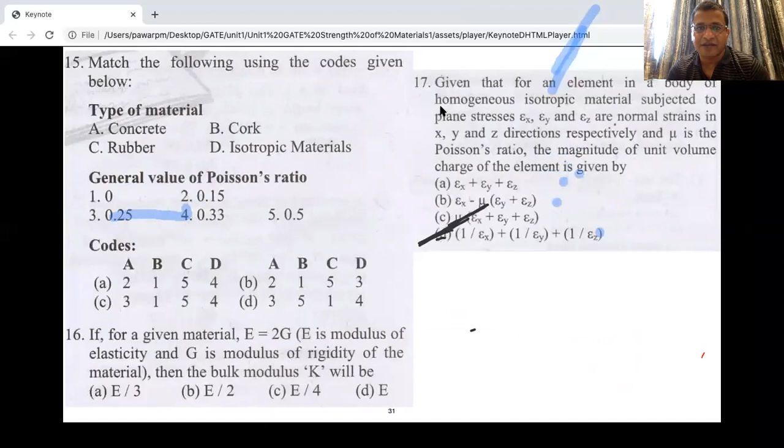Okay, similar to Poisson's ratio, here is a match the pair question. For concrete, usually we have seen it is around 0.15. We will match the pair. Let's take a little break and match the pair, so someone can help me.

Concrete, I guess 0.15. Cork, do you remember? 0. Rubber, exactly 0.5. And isotropic material, somewhere around 0.25, it was around 0.2 to 0.3. So I guess this way, if we do, you can see the answer is nothing but this.

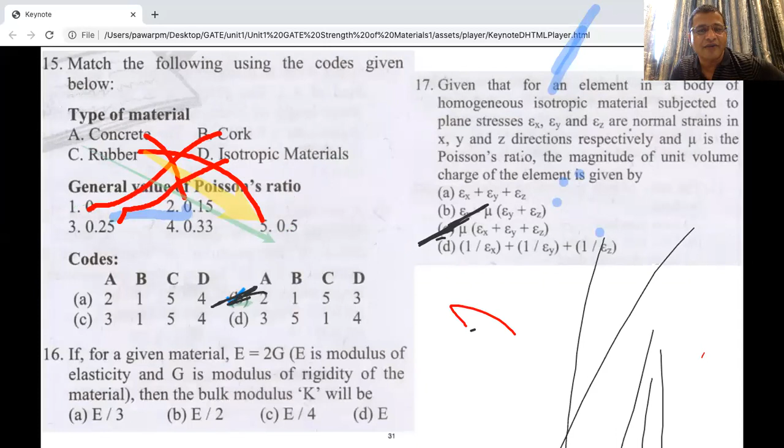Is it correct? So for A, it is 2, correct? And for B, it is 1. For C, it is 5, and D is equal to 3. So you can see here, sometimes match the pair becomes difficult because it is a 4 to 5 relation. Okay, let's go to the next question.

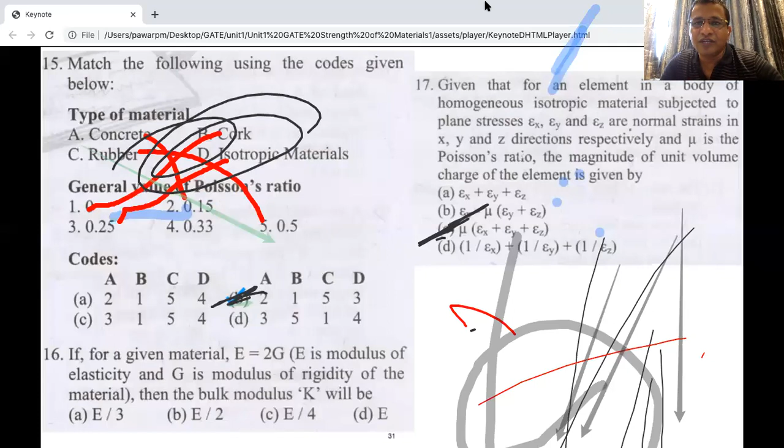What is there? If given material E is equal to 2G, where E is modulus of elasticity and G is modulus of rigidity of material, then bulk modulus K will be. So what will be the bulk modulus?

If E is equal to 2G, K is bulk modulus. So if you do that, the answer is E by 3. I guess, maybe I have derived this, and this is very simple.

But volumetric strain is nothing but sum of all the 3 strains. Maybe for this derivation I have done it on the next slide. Okay, so the next question is a numerical type of question.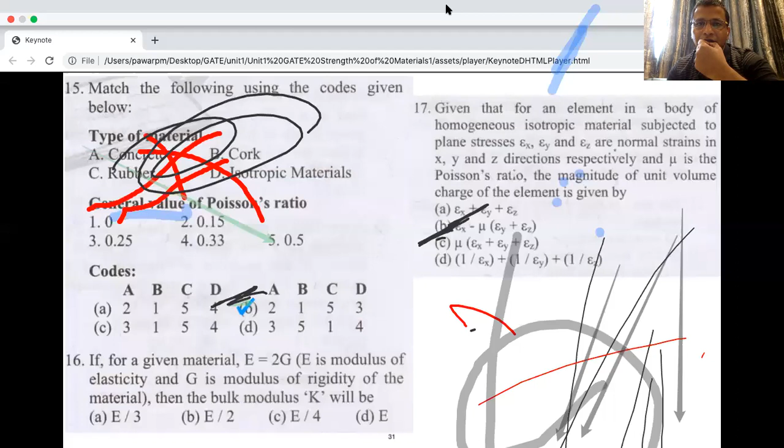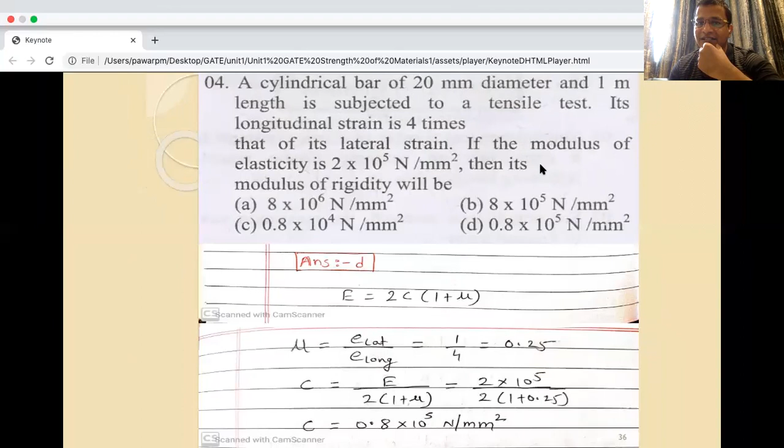So we have to calculate linear strain. What is the linear strain? It will be P/A is the stress, and divided by Young's modulus is the strain. So P is given, cross sectional area is given, and divided by Young's modulus you will get linear strain.

Then for lateral strain, you have to multiply linear strain by Poisson's ratio, you will get the lateral strain. Another formula for lateral strain is change in diameter to the original diameter. Original diameter is given, you have to find out change in diameter. So I will repeat again: first you calculate longitudinal strain, then use that and multiply by Poisson's ratio, because lateral strain to longitudinal strain is equal to Poisson's ratio, and from that you get lateral strain. And there is another formula, change in diameter to original diameter, and from that you get the change in diameter.